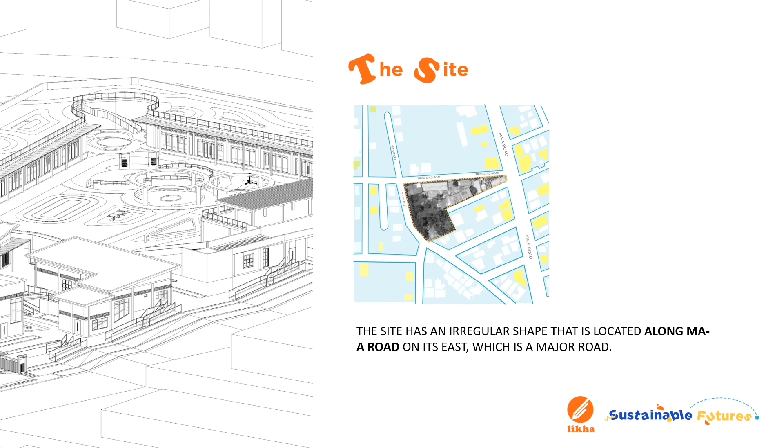The site is an irregular shape that is located along Ma-a Road on its east, which is a major road. Its northern side is fronting Trinidad Road, western side at First Street, and the southern side an alleyway called Brown Street. The site is currently occupied by 2 construction firms, namely Bislig Ventures Construction and Development Incorporated and Carwell Construction Incorporated. It also has an underdeveloped portion which is full of vegetation. It has a land area of 5,120 square meters or 0.51 hectares and has a total perimeter of 367 meters.

Upon the completion of the slope analysis, it can be observed that the site has a low inclination of the slope while having a short portion of a highly inclined slope kept in the middle of the site. With this analysis, 3 areas were determined for consideration. The lower area and upper area in the site have the most potential for development since the slopes in these areas are less inclined to relatively flat. The middle area of the site has less potential for development as the slopes in this area are highly inclined. Thus, development in this area would require extensive planning and additional processes to ensure strong development.

The slope of the site was highly prioritized to create a distinct character in the overall proposal. It mimics how abstract art can be, with varying curves, sharp lines, and geometric forms.

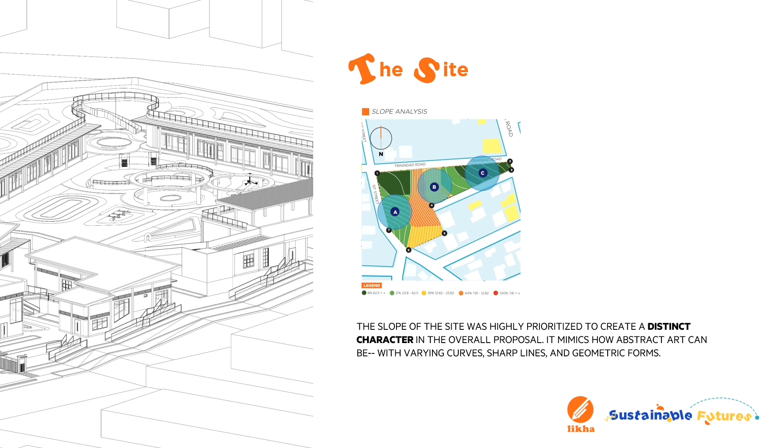For the design concept used in the overall study, first we have cultural responsiveness. Students' voices, thoughts, and experiences are essential to the educational process and the social action approach of culturally responsive teaching and arts immersion.

Certain developments in the design context have contributed to the prominence of the culture-environment linkages nowadays generally. For instance, constructed form has traditionally responded to culture effectively in vernacular and preliterate environments. Such settings efficiently and thoroughly interacted with users as opposed to the present criticism that surroundings do not engage and do not exchange knowledge. Reflecting the cultural context of Davao City in the overall design of the built learning environment and the learning curriculum, inclusivity is highly prioritized.

Blurring the outdoor and indoor line. A kindergarten school's outdoor area has various elements intended to encourage organized and unorganized physical activity, play, and learning as a natural outdoor play and learning environment. The possibility for broad engagements, improvisation, discovery, exploration, risk-taking, and relationship with nature is made possible by being outside, particularly in outdoor natural learning spaces.

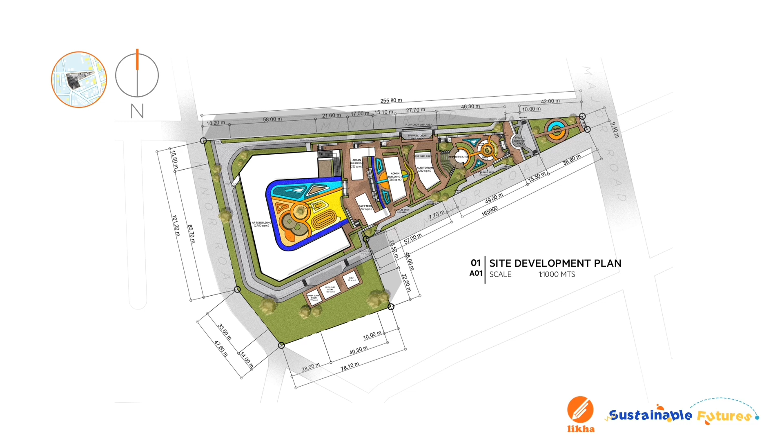This is the site development plan of the study. As you can see, the site is divided into different portions through the slope present within the site. There are 5 main buildings, namely Arts Building, Admin Building 1, Admin Building 2, Cafeteria, and the Auditorium. There are also prominent spaces like the amphitheater, the community space, and the public park, and other buildings which are the utility buildings called the water supply room, the mechanical and electrical room, and the MRF.

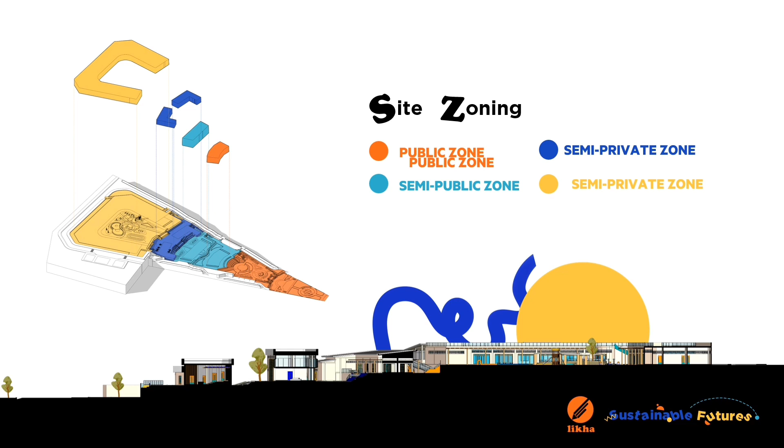For the site zoning, the steep terrain of the site has been taken advantage of for different zones for specific purposes. The zoning is significant to the academic nature of the proposal. For the color orange, we have the public zone. This zone welcomes the general public, especially with the site being surrounded by a residential area. The zone includes a park and an amphitheater where students can perform for the community. Before the public park, we have a PUV drop-off area which jeepneys and other PUV vehicles utilize, being situated along Ma-a Road.

For the second zone, we have the semi-public. This zone serves as the transition between the community and the exclusive members of the school. Buildings like the auditorium and the admin building 1 are included. Thirdly, we have the semi-private zone. The admin building 2 as well as the cafeteria encompass a zone where the general public can have a glimpse of the learning area. Lastly, the private zone, or what we call the learning zone. It is where utmost privacy and safety are prioritized, since this is where significant activities take place daily. This is where students learn and conduct their classes on a daily basis.

For the longitudinal section of the site, you can see that the zoning is prominent through different levels. For the third level, we can see the semi-public zone wherein the auditorium stands tall. For the fourth level, still in the semi-public zone, we have the admin building 1. And lastly, for the private zone, the arts building is situated.

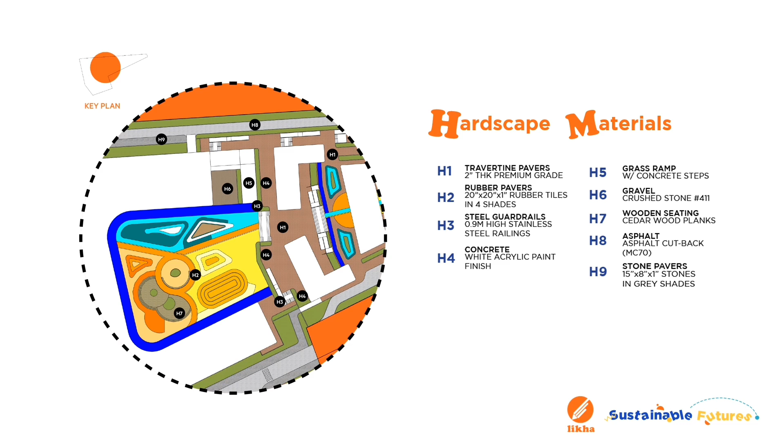H7 are wooden seating, cedar wood planks. H8 are asphalt cut-back MC70. And lastly for H9, these are stone pavers of 15 inches by 8 inches by 1 inch stones in gray shades.

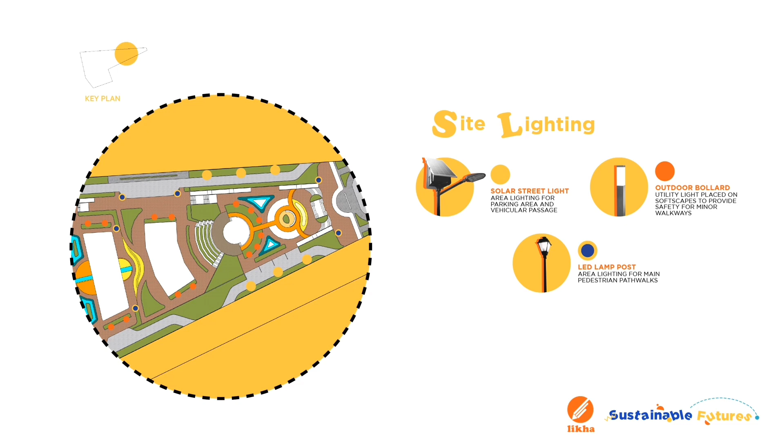Next, for the lighting fixtures used within the site, there are 3 major lighting fixtures being utilized. For the first one, we have solar street lights, wherein area lighting for the parking area and vehicular passage are prioritized. Next, we have the outdoor bollard, a utility light placed on softscapes to provide safety for minor walkways. And lastly, we have the LED lamppost, wherein area lighting for main pedestrian pathwalks is prioritized.

We now proceed to the vehicular circulation within the site. The site specifically allows one-way access on all of its roads to prioritize the security and safety of pedestrians. For the orange line, we have the public vehicular access. From Trinidad Road, public utility vehicles can enter the site and drop off passengers through the main gate of the complex. PUVs can then exit through Brown Street.

Next, we have the private vehicular access. From Trinidad Road, privately owned vehicles can enter the site and travel upwards towards the lower ground parking area. For non-staff or student-owned vehicles, a parking space is available through the Brown Street entry. This is specifically going to be used for the amphitheater and the auditorium. Both accesses lead to an exitway at Brown Street.

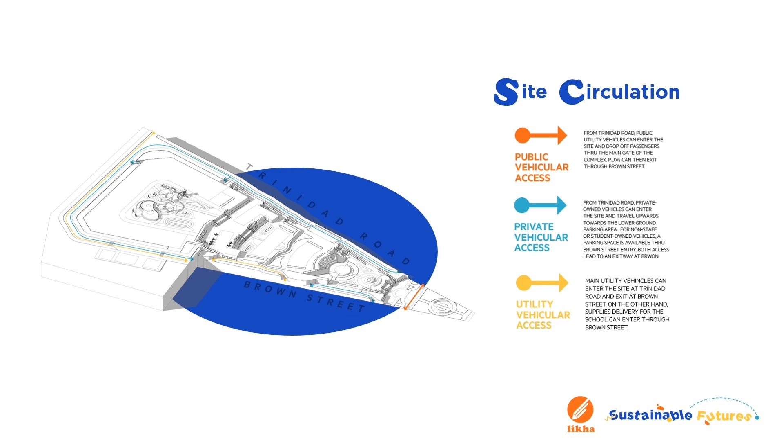Lastly, for the yellow line, we have the utility vehicular access. Main utility vehicles can enter the site at Trinidad Road and exit at Brown Street. On the other hand, supplies delivery for the school can enter through Brown Street.

Within the private zone, activities focusing on creating various learning outputs through the arts are being utilized. This is the main purpose of the complex. For recreation, these activities include leisure, eating, and other physical activities that contribute to the main program. It can be seen scattered throughout the site, and it is a vital program for the complex. It can be seen in the private zone, semi-private zone, and also in the public zone.

Executive-related activities are conducted within the semi-private zone, as this is where office spaces are located, like the admin buildings and the cafeteria. Perform. After creating, students are able to showcase their outputs to the community, hence the location of performing activities within the semi-public zone as well as the public zone.

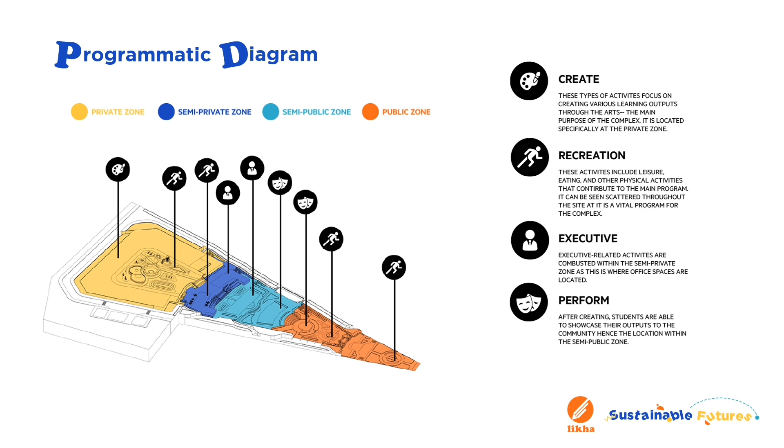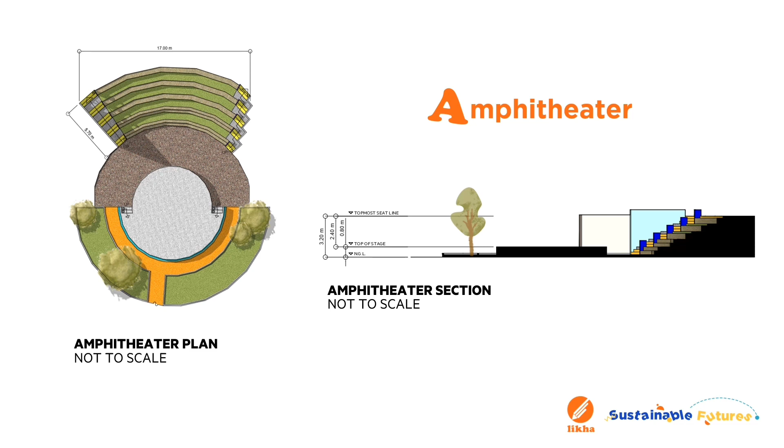The main feature of the site is an amphitheater. This is located within the middle of the site, where high steepness takes place. The amphitheater is 17.00 meters long with a seating of 5.76 meters wide. It has 5 tiers, with 2 levels specifically designed to cater to the children and another 3 for adults.

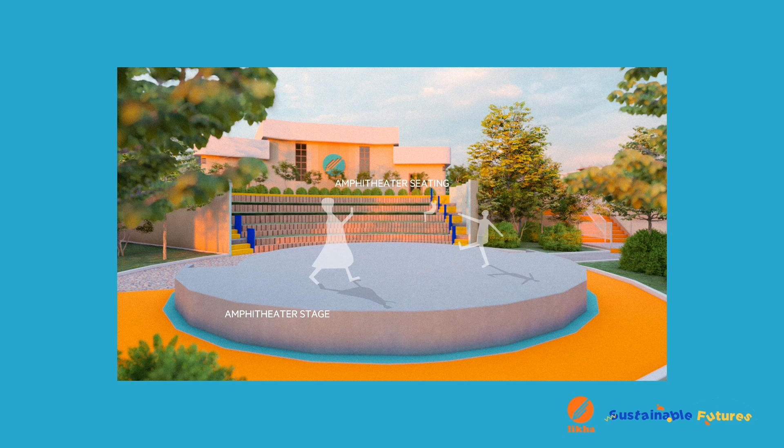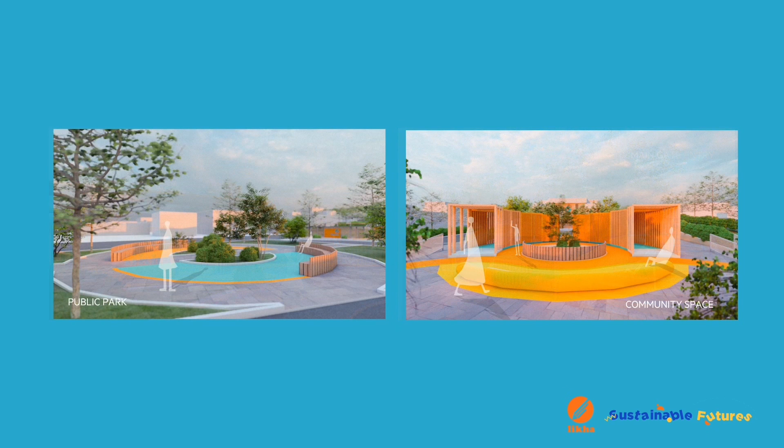We now proceed to the arts building. For the planning, it is divided into 3 levels. The lower ground floor plan is intended for the lower ground parking space, which is purposely designed to have a lower height compared to the main area of the building, as this will be connected to the green ramp, so it would provide a swifter and softer slope for the children.

Next, the ground floor plan is divided into 2 wings, the west wing and the south wing. In the west wing, classroom 1, the music room, and the dance studio are located. In the south wing, we have classroom 2, the arts workshop room, and the library.

As you can see, 2 interior bonsai gardens are seen as part of the design concept of the study. For the middle part, we have an indoor play area wherein the main entry is also located. A stairs within the main entry can also be seen leading towards the roof deck play area.

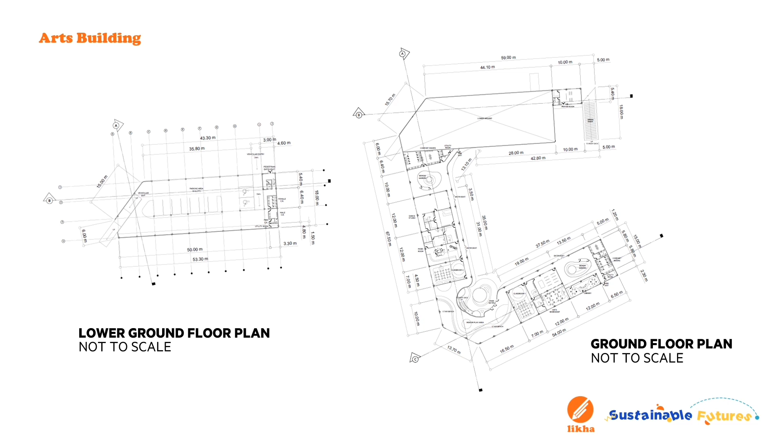We now have the roof deck plan. There are 2 ways to enter this part of the building. We have the green ramp, which is located on the north wing, as well as a stairs located on the main entry within the center of the building. As you can see, geometric lines and shapes are designed along with greenery to create an interactive garden that can be used by the students along with a play area.

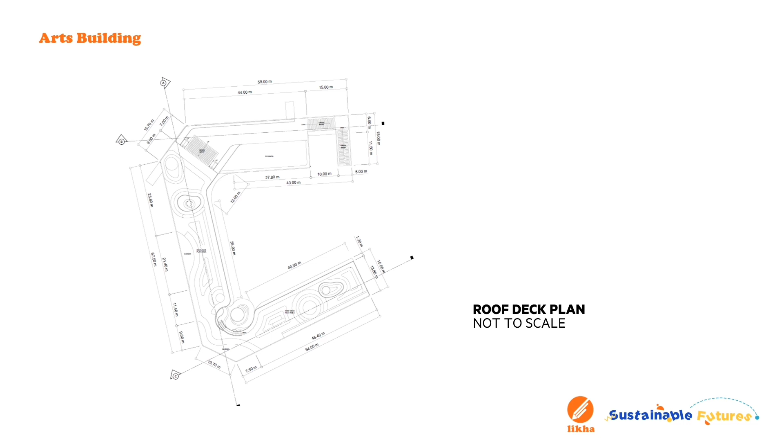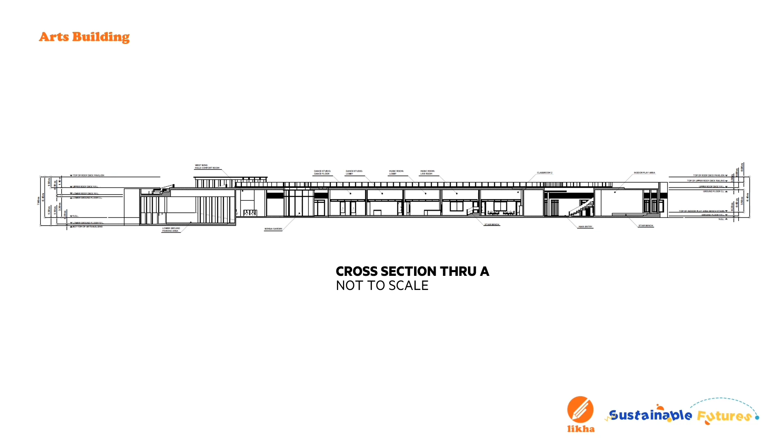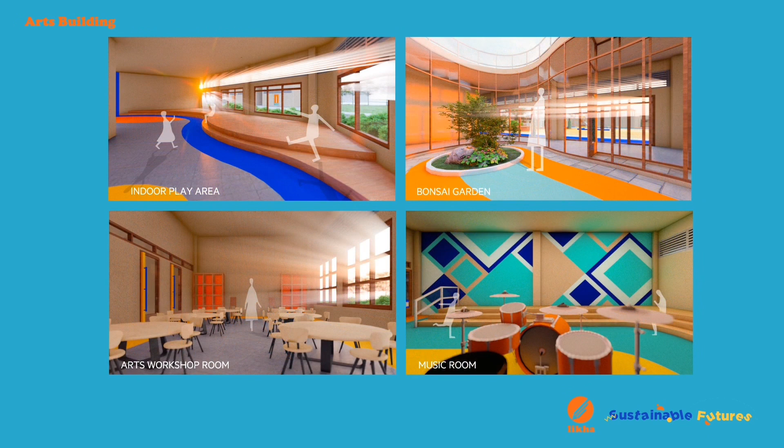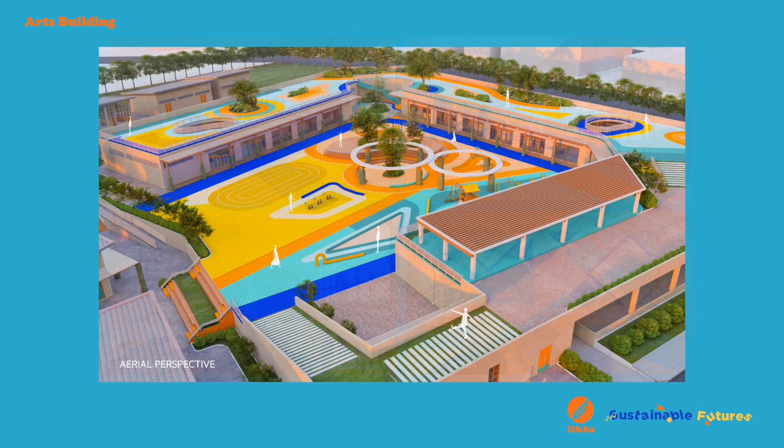Here are some interior renders of the building. The indoor play area, a bonsai garden, an art workshop room, and the music room. Here is an aerial perspective of the building where you can see the roof deck area and the outdoor play area within the middle, the focal point of the site.

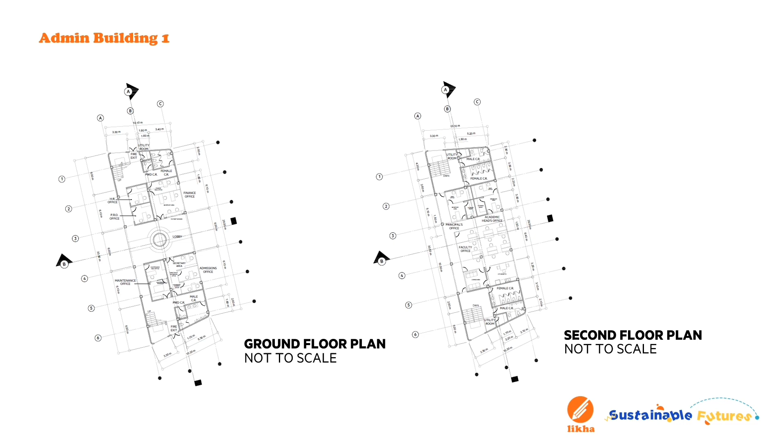We now proceed to Admin Building 1. For Admin Building 1, a 2-story form is necessary to cater different offices for the building. For the ground level, the main lobby faces the finance office, the admissions office, as well as the PRO office, the HR office, and maintenance office, with 2 public restrooms on both sides. Up we go to the second level, we have the more private spaces, which are the principal's office, the academics head office, and the faculty office.

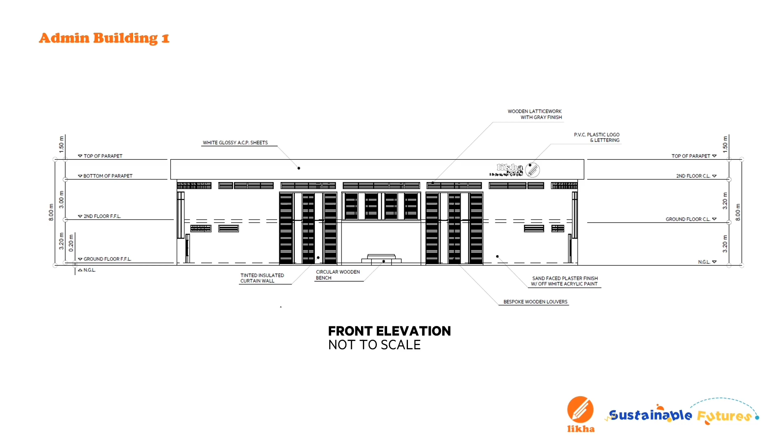For its elevation, the building uses a tinted insulated curtain wall, hence the application of bespoke colored wooden louvers to protect the interiors from unwanted sunlight and extreme climate conditions. A logo of Likha is also placed as this building serves as the face of the school. Here are the renders of the building. These are the bespoke colored wooden louvers applied against the curtain wall. It is tilted in a specific angle as this is where extreme sunlight comes from.

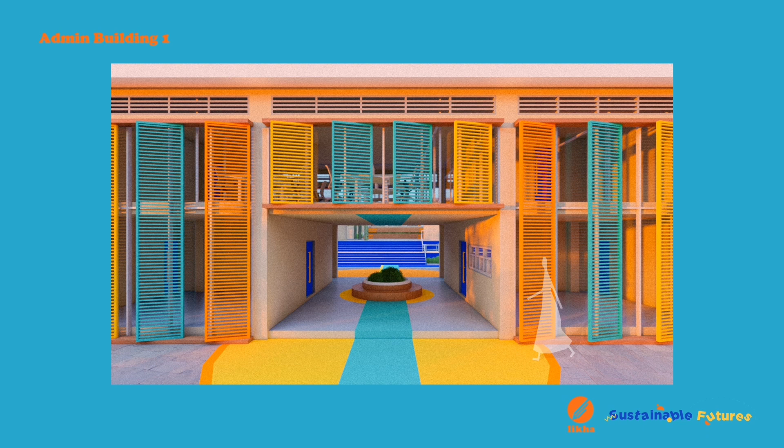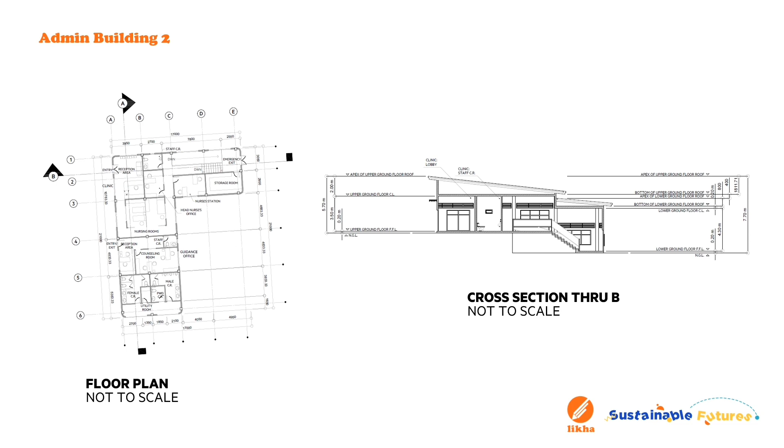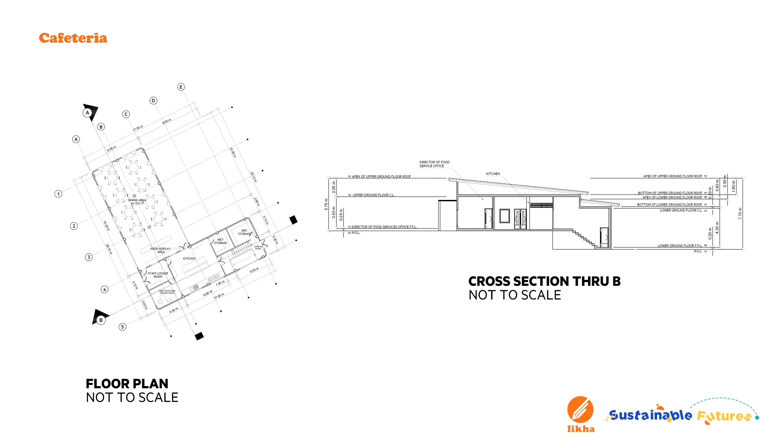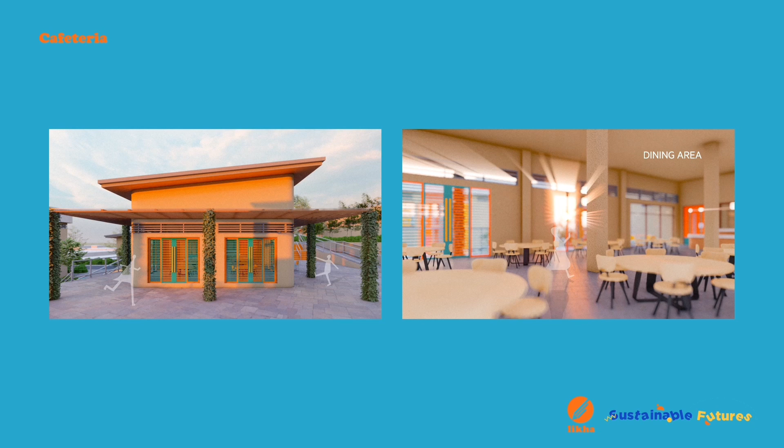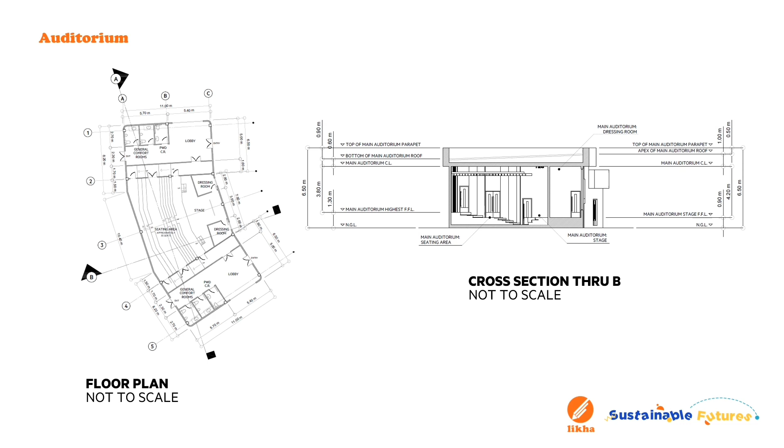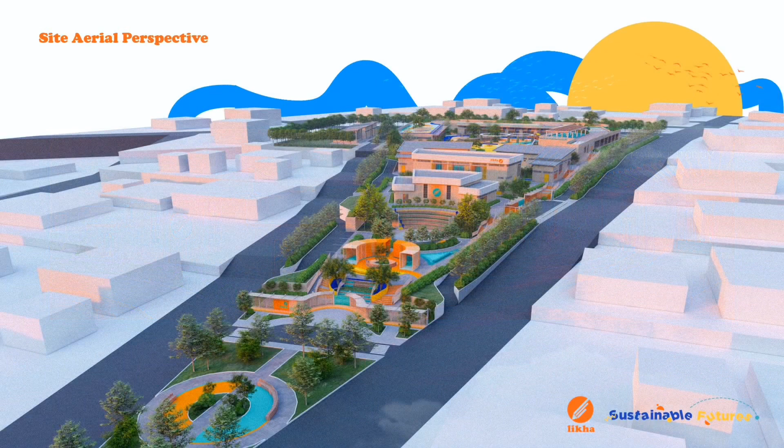Here is an aerial perspective of the site. Likha is not a typical kindergarten school, but an innovative kindergarten complex which focuses on the sustainable development goals of the United Nations as it ascends to a more inclusive and innovative educational experience for Filipino kindergarten students within the country. I am Larida and that is Likha.